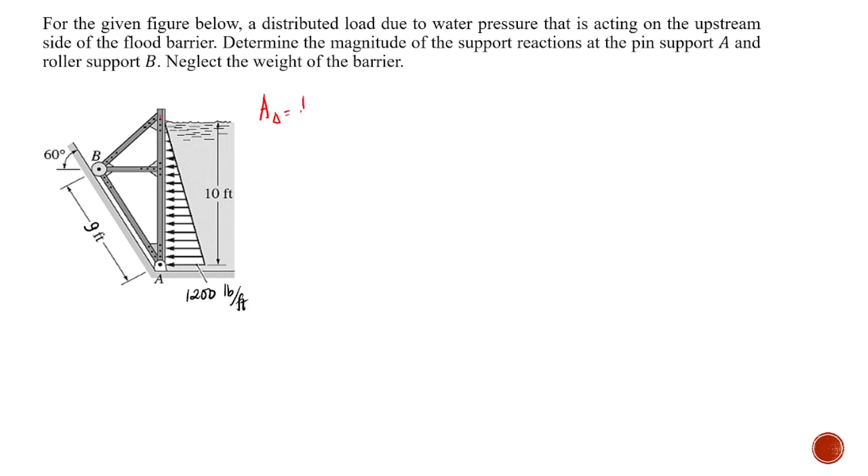So, recalling natin yung area ng triangle, that is 1/2 base times height. In this case, ito yung magiging base natin, which is 1,200. At yung height natin, that is 10. So let's try. Area of the triangle, that is your resultant, or your single point. F na lang ang gamitin ko. 1/2 of 1,200, then we have 10 feet.

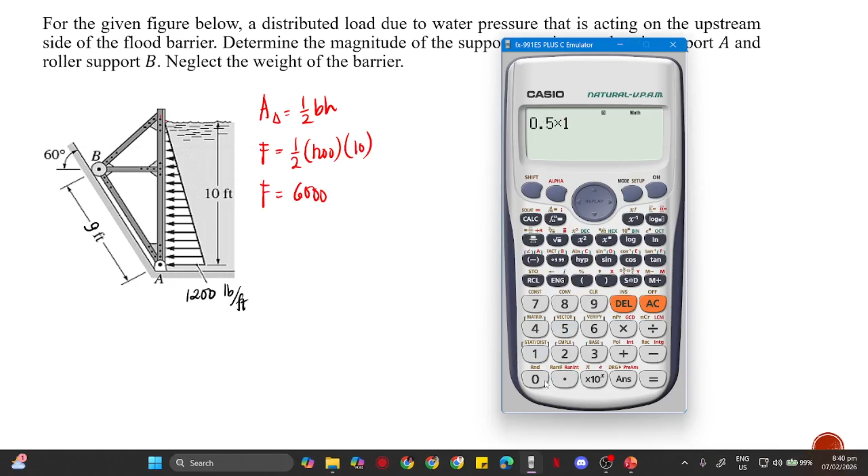So pound over feet times feet, that will become pound. So that is 600 times 10, that is 6,000 if I'm correct. Let's check. 0.5 times 1,200 times 10, that is 6,000 indeed. So that is 6,000 pound. So therefore, saan ba yan malolocate? Yan yung magiging single point load equivalent ng distributed load.

Hindi natin alam kung saan yun malocate, or saan yung centroid ng triangle niyan. Unlike yung rectangle, that is a uniform geometry, kaya sa gitna. In this case, pag triangle, yung force na single point, somewhere dito yan malocate, this 6,000 pounds. So pag triangle, ito yung dapat i-remember nyo. Ito yung narrow, ito yung wide.

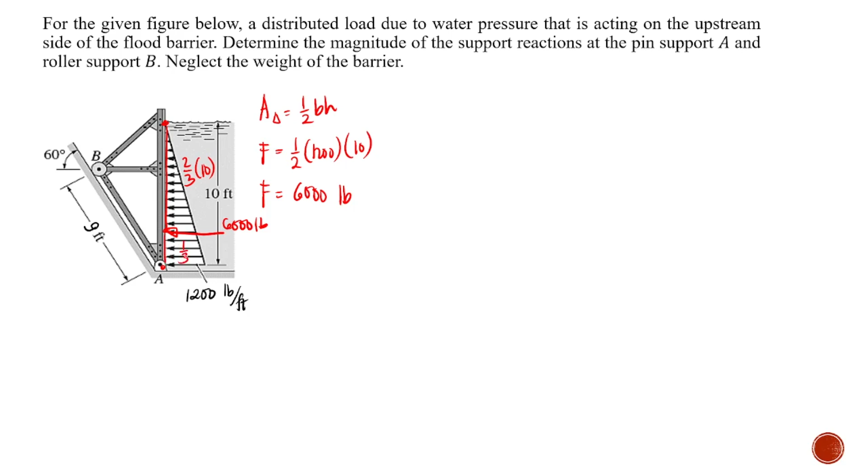Kung galing ka sa narrow papuntang centroid, that is about 2/3 ng mismong length, which is 10. Kung galing ka dito papuntang centroid, that is 1/3 ng 10. Yan yung location pag triangular. Always remember that. 2/3 of the height pag galing ka sa narrow side. Pag galing ka sa wider side, that is 1/3 lang ng height mismo.

So draw natin ang free body diagram niya. We have here this barrier. Then ito, roller yan. So meron din tayong mga reactions, gawin natin green. Meron tayong reaction at B, RB na lang. We also have reactions sa pin A. Since that is a pin, we have AY, then we also have AX.

Aside from that, yung nakuha natin na equivalent single load ng distributed, that is 6,000 pound located from point A at 1/3 of 10, or 10/3. So dito this is 20/3, fraction na lang para exact. And also this is 9 feet. Yung angle, ito 60 degrees. The same lang yung angle dito, 60 degrees.

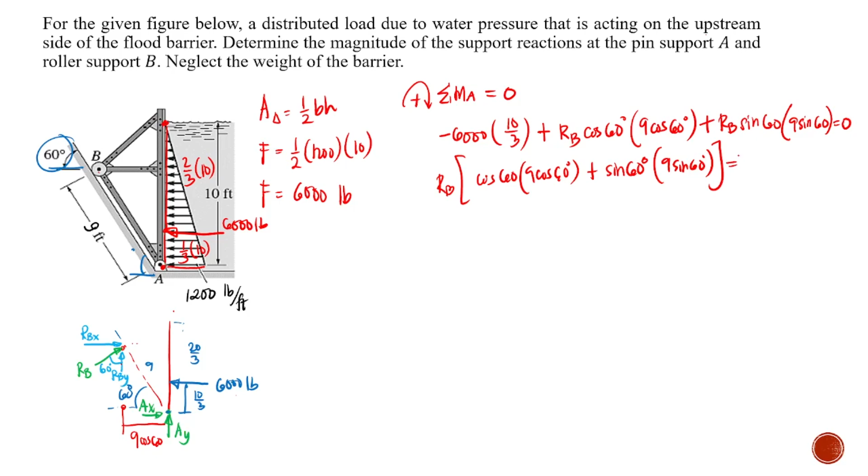So, again, same concept. RB can be factored out, it is common. This negative 6,000 times 10 over 3, we transpose. So factoring out RB: cosine 60 times 9 cosine 60 degrees, plus what remains of the other term, sine 60 times 9 sine 60. That is equal to 6,000 times 10 over 3.

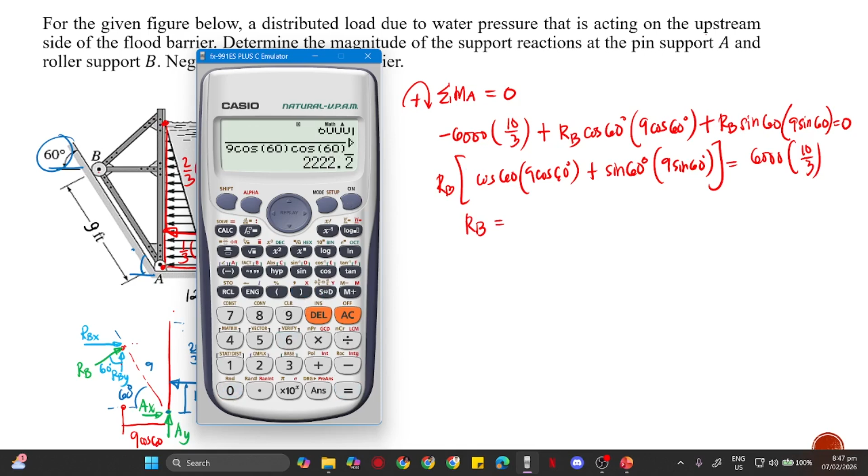It's positive now. So let's bring out our calculator. First, 6,000 times 10 over 3. Then we have 9 cosine 60, multiplied by cosine 60, plus 9 sine 60, multiplied by sine 60. Press equal. That is about 2222.2, repeating. So that is our RB, 2222.2 pounds. Let's box that. That is for letter A.

That's our roller support at B. So next is the support at pin A. Since we now have our RB, we just do summation of forces. Let's start with summation of forces along X equal to 0, going to the right positive. What are the forces going to the right? RBX, or that is RB, which is equal to 2222.2.

For RBX, that is sine 60 degrees, going positive, to the right. Aside from that, this 6,000 goes to the left, so it will be negative 6,000. And AX, which we also assume goes to the right, equals 0. So, using the calculator, let's transpose the 2222.2 sin 60 to the other side, and the 6,000 too. The negative becomes positive.

If it turns out negative, then our assumption was wrong. Negative 2222.2 sin 60, and the 6,000 becomes positive. That equals 4,075.52. So our assumption was correct because it's positive. 4,075.52 pounds. So, that is your AX.

Therefore, our AY is a negative value. Let's change this to cosine. So AY is negative 1111.1, with the 1 repeating, pounds. Or in that case, AY is equal to 1111.1 pounds, but instead of going up, its direction is this way. So we should also indicate the direction.

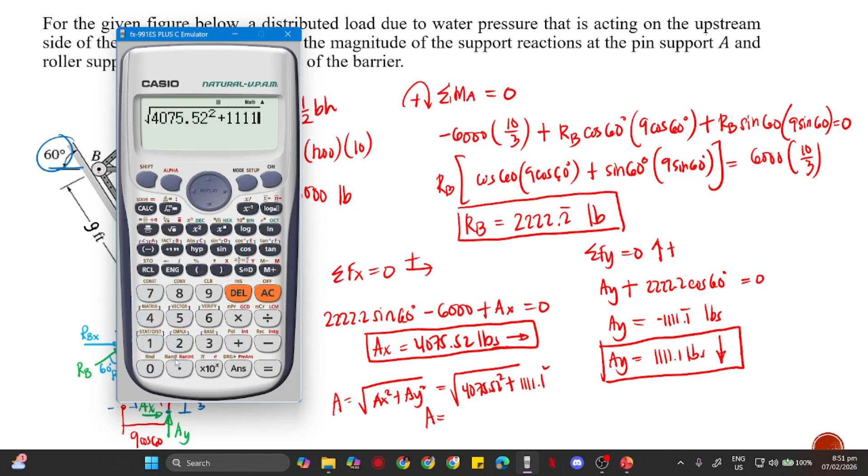Now, if the choices give only one value, then, same as earlier, we get the resultant. That is the square root of 4,075.52 squared plus 1111.1 squared. That is the total or resultant reaction at pin A, and that equals 4,224.26 pounds. That is your pin reaction at pin A. So that's it for this problem.

So, guys, if you see that I made a mistake in the calculation, you can always tell me so I can correct it. But you should also understand it. So, that's it for this problem.

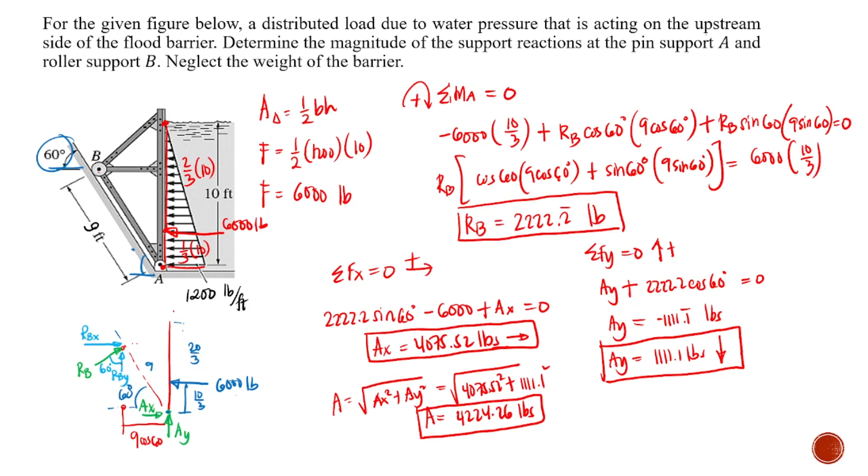We'll be discussing the last problem, and this time we will be dealing with three-dimensional. So, that's it for this video.